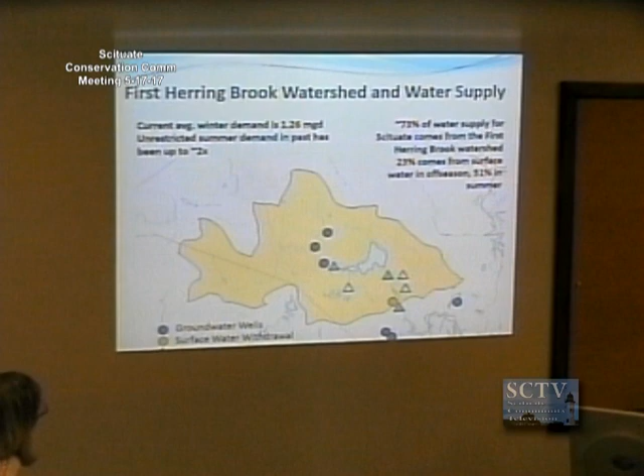Essentially, 73% of the water for Scituate comes from the First Herring Brook watershed, and 23% of that is from surface water. History goes way back.

2011, the modeling was done with this WEAP modeling to look at water supply. In 2012, we did a preliminary assessment, basically appraisal level, very short and high level, looking at what options exist to get fish up into Reservoir Dam.

We also worked on improving the baffles down at Old Oaken Bucket to get fish up into Old Oaken Bucket Pond. In 2013, we did a feasibility study, and in 2014 we followed that up with a preliminary design.

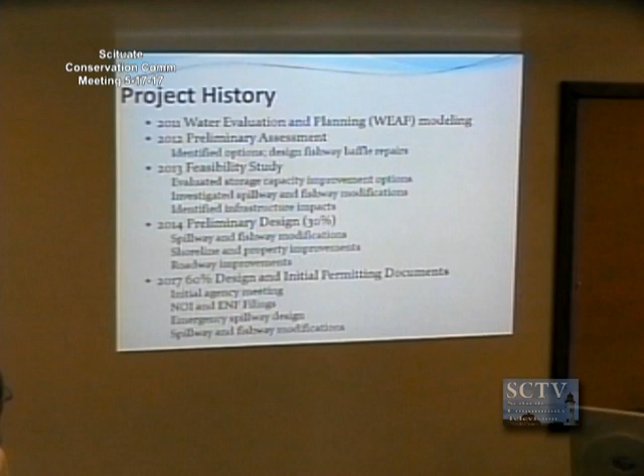Now we're in the 60% design and initial permitting phase, and the primary purpose is to get the Notice of Intent process started, and also to begin the Environmental Notification Form process with MEPA.

Our project goals have been to meet Scituate's water needs while also providing seasonal stream flow for aquatic habitat in the First Herring Brook, downstream of Old Oaken Bucket, between Old Oaken Bucket and Reservoir Dam, and upstream of Reservoir Dam, and also to get the fish ladders functional.

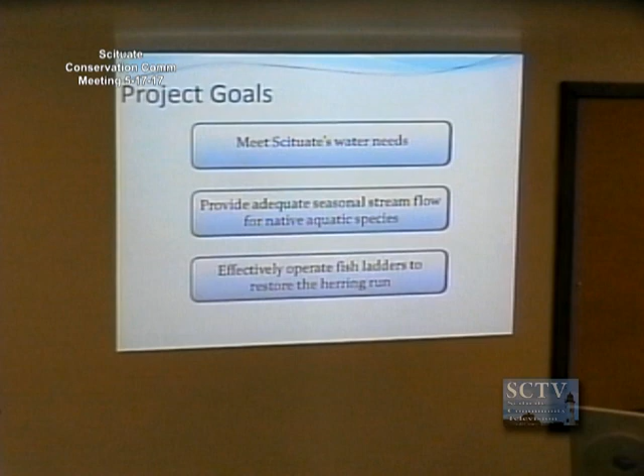In 2011, they came up with an interim operational plan, which is still being implemented with some minor modifications over the years. That plan essentially looked at ladder operation at Old Oaken Bucket, and also incorporated some irrigation restrictions and watering bans.

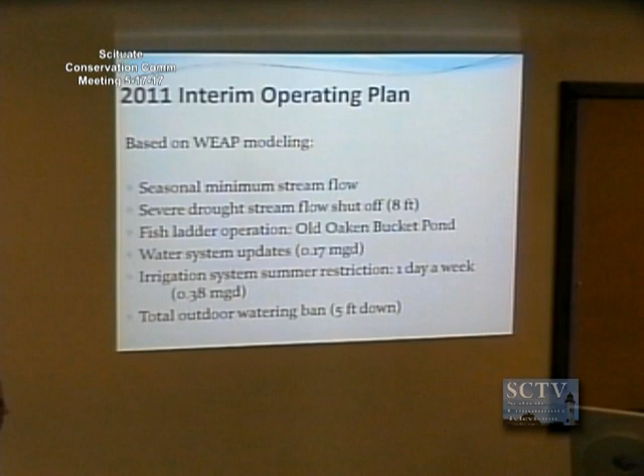The modeling we did to look at the alternatives was extensive. There were around 100 scenarios looked at, covering a range of things from modifying the dam outlet.

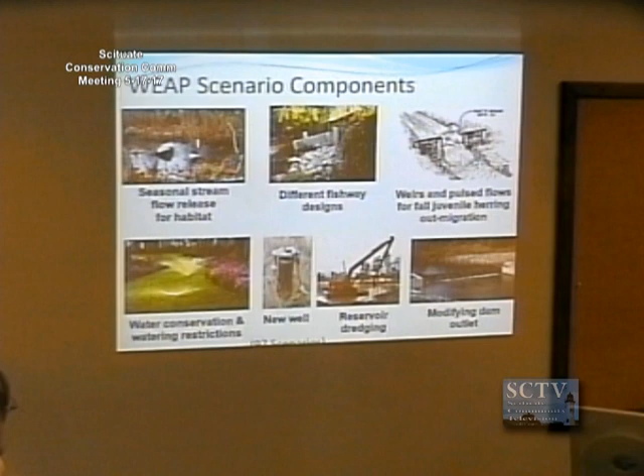Putting in different fishway designs, seasonal stream flows, and new water well sources. In 2013, the model was updated to look at improving and increasing the water storage. During that study, we looked at raising the pond level up to 3.5 feet above where it currently is.

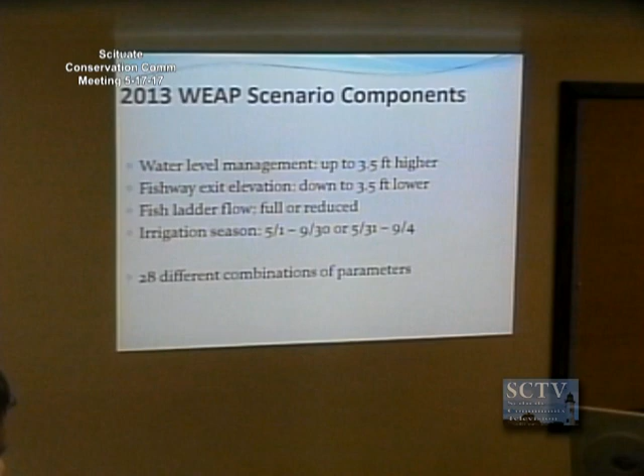From that, the most promising scenario was raising it 1.5 feet, and that's where we are now. We're looking at lowering the fishway exit 3.5 feet, and we're looking at reduced flow in the ladder.

Right now, the ladder is allowed a lot more flow than necessary for both upstream and downstream passage. We're also looking at the irrigation system and irrigation season limitations.

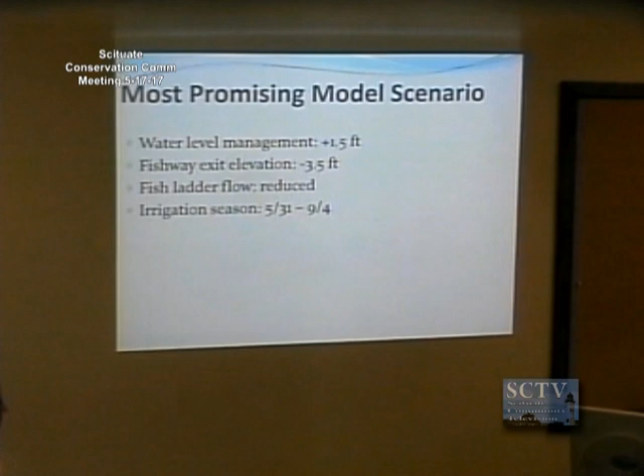Our modeling this year basically compares the existing fishway and current operations to the best modeled scenario. As you can see, the proposed plan provides much more effectiveness than the existing setup.

One of the important things is the minimum reservoir level. Currently, it goes down to about elevation 32, and in the proposed scenario, it would be about 3 feet higher.

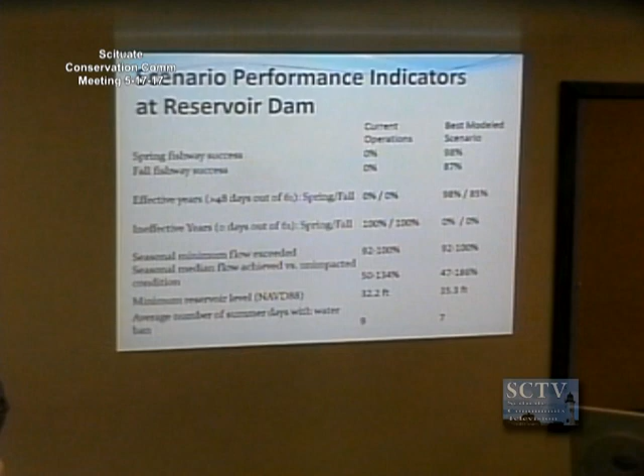This year we looked at 3 or 4 different scenarios, and this is the best of them. The basic challenge here is trying to increase the water storage above the current spillway crest.

Right now, the management flows are released through the low-level outlet. The plan would be to release a good portion of those flows through the fishway instead.

So it would be a combination of the low-level outlet and the fishway to get the stream flows necessary for both water supply and habitat.

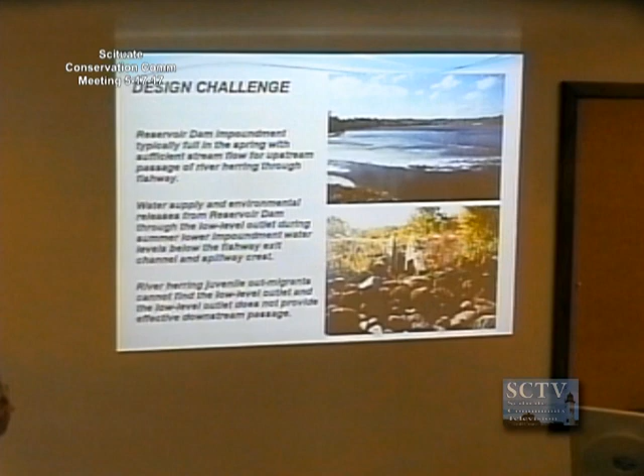This is a picture of the fishway on the left. Essentially, we're looking at lowering that upper exit channel about 3.5 feet, and by raising the normal pool water level 1.5 feet higher, that will give enough storage for sufficient water in the fall for the outmigrants.

In the spring, there's generally enough water for upstream migrants to get there. The problem is when the water is used during the summer, the fishway becomes unacceptable. So by lowering the exit and increasing storage, we have a higher range that allows proper operation.

What we're looking at on the right-hand side on the spillway is putting in a bottom hinge gate that will be motor operated. We're looking at putting that into the SCADA system so that it would be operated from the water department.

Essentially, with the proposed spillway modifications, there would be no change to the flood control aspects of the current spillway. As it rains and the water comes in, that gate would come down, so if the water level goes up a little bit, the gate comes down to more evenly control that water level at the higher level. One benefit of this gate is follow-up: if you get a real flood, the gate goes all the way down, but as that flow is receding, you're able to bring the water back up to save that 1.5 feet of water rather than letting it go down and having to go back to square one.

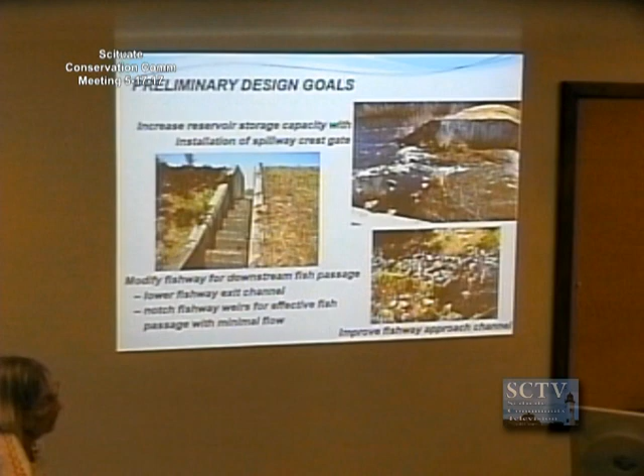The other aspect of the project, in the lower right-hand corner, is the entrance to the fishway at the bottom end. It's difficult for fish to get up there, so there'll be a few minor stream modifications, including a stone weir, pool and weir, to get the fish up there -- I think there's two weirs.

So basically, what we're looking at is raising the pond level to elevation 40.4, which is 1.5 feet above the existing crest, and this will increase the storage capacity by 108 acre feet of water.

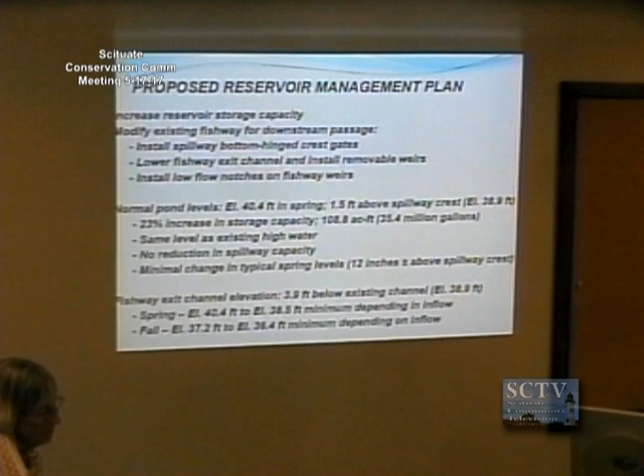Essentially, the water currently gets up this high at the spillway during the spring and flood flows. That happens now, so we're not raising flood levels -- it's essentially the same conditions experienced now. And then, as I said, we're lowering the fishway exit channel to allow passage in the fall.

What has been added to the project this year was the spillway capacity. The Office of Dam Safety has recognized that the spillway does not have adequate flow capacity to pass the design flood with adequate freeboard. So this project will involve increasing that spillway capacity by lowering the crest about 3 feet. The gate will be higher than the 1.5 feet originally planned back in 2014, and would include a larger gate to give the flood capacity to discharge half the probable maximum flood with freeboard.

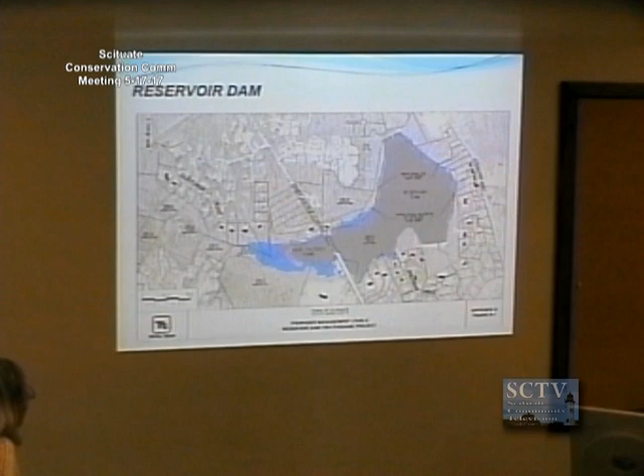So that's the spillway up in the upper left. What we're talking about is putting a gate section on that, lowering it by about 3 feet -- the crest will be coming down, I think, 3 to 3.5 feet. That gate will be motor-operated with automatic controls, set up with a water level sensor, so it would actually follow the inflow to make sure we don't waste any water.

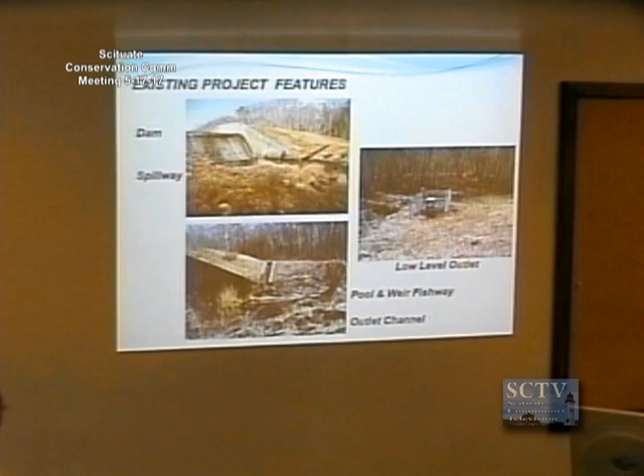The fishway at the bottom end -- we've got to fix the lower weirs there, and you can see the channel down to the right. We've got to do some stream work, moving some rocks around, putting in a couple weirs to get the fish up to that fishway entrance. That's a low-level outlet on the right-hand side -- a 12-inch pipe with a control valve that the water department currently uses to release flow to Old Oaken Bucket.

And just some more pictures of it, with some flow, actually. You can see the Old Oaken Bucket fishway on the left-hand side.

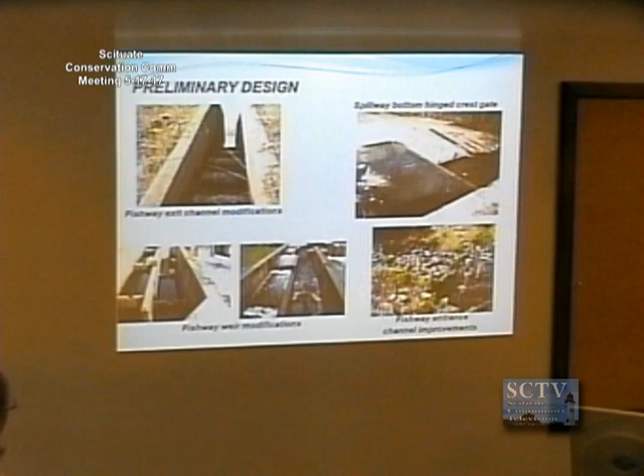Those are the modifications that were put in during 2013 to save water through these low-flow notches. Benefits: we're basically providing 23% more storage, 108 acre-feet of water. This will allow continued water supply, better water supply, while providing environmental flows, and will provide more resiliency to drought and emergency conditions.

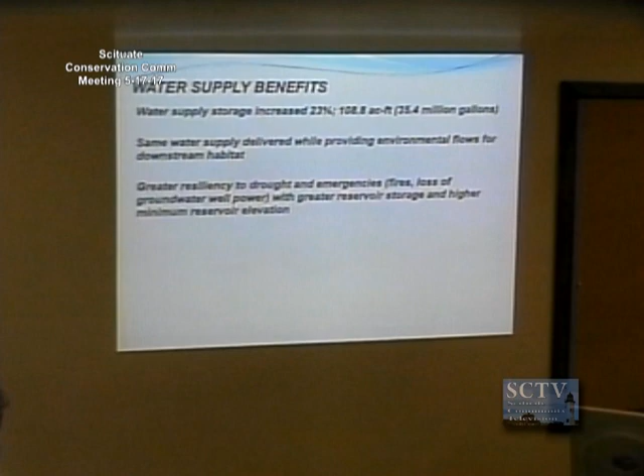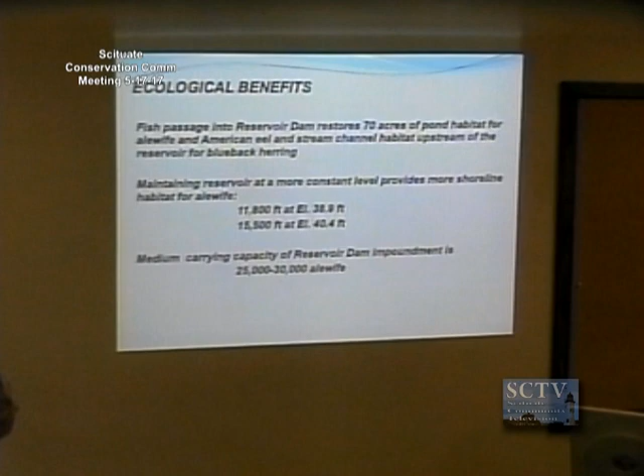Ecological benefits: we're essentially restoring about 70 acres of pond habitat for alewife and American eel, and opening up the stream channel upstream of the Tack Factory Pond for blueback herring. Essentially, the 1.5 foot higher level increases the shoreline habitat by about 4,000 linear feet. Sarah's estimated that the median carrying capacity of the reservoir impoundment would be about 25,000 alewife versus 0 now.

The good stuff that you're all interested in: there's about a 1,400 linear foot reduction in bank length.

Is there a reduction? What's that? A reduction in bank length? Yes. We defined the bank length currently, and when you raise the water level, the bank length actually changes - it goes down. It seems a little contradictory. It does, but that's only when it's full, too, right? But it's going to keep it at a steady level.

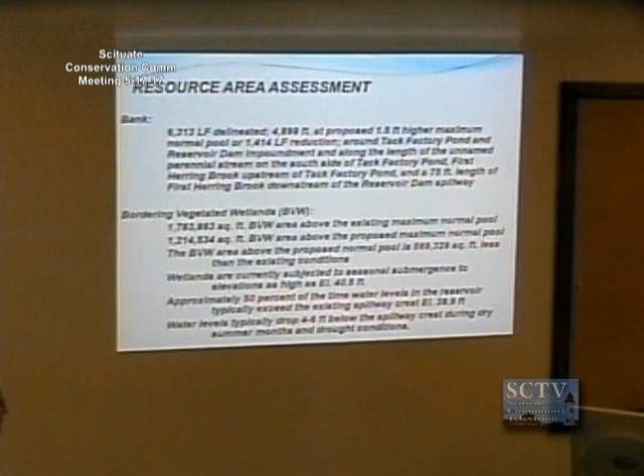Land underwater at the existing reservoir is about 52 acres. At the higher reservoir, because the mean annual low flow level is higher, it increases to 60.8 acres.

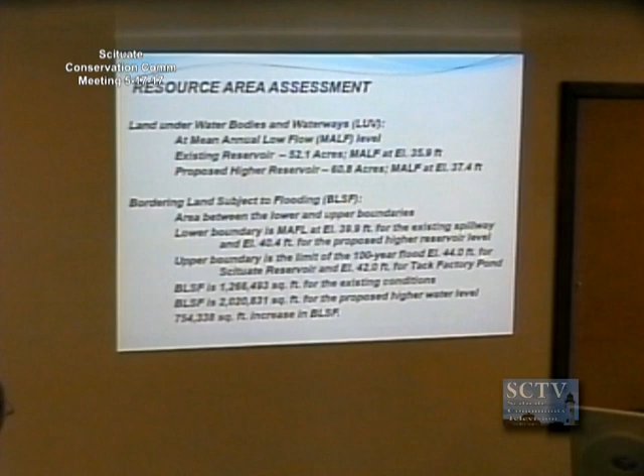Bordering land subject to flooding is increased by about 750,000 square feet because of the higher water level. Riverfront area: the current pool is about 330,000 square feet, and with the 1.5 foot increase, it goes down to 278,000 square feet - about a 52,000 square foot decrease.

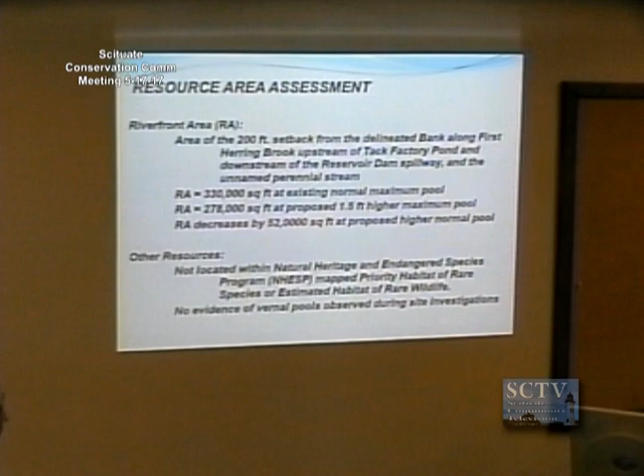And the other resources - basically the site is not located in the Natural Heritage and Endangered Species Program, priority habitat of rare species, or estimated habitat of rare wildlife areas. And while our wetlands scientists were flagging the wetlands, they did not observe any vernal pools around the edge.

The project will include some shoreline improvements. Basically, there is no change in the high water level. There are about 14 acres of land that would be subject to seasonal flooding more than now. The water supply buffer zone - everything is within the 150-foot water protection district.

All properties currently within the DEP Title V regulated areas are within 200 feet of the reservoir. Septic systems: there are 3 systems near the pond off Chief Justice Cushing Highway, and 2 of them have raised mounded systems. In 2014, we did some groundwater monitoring, and it looks like there's adequate separation between the groundwater and those septic systems, so they should be okay. There was one property that would have to be upgraded.

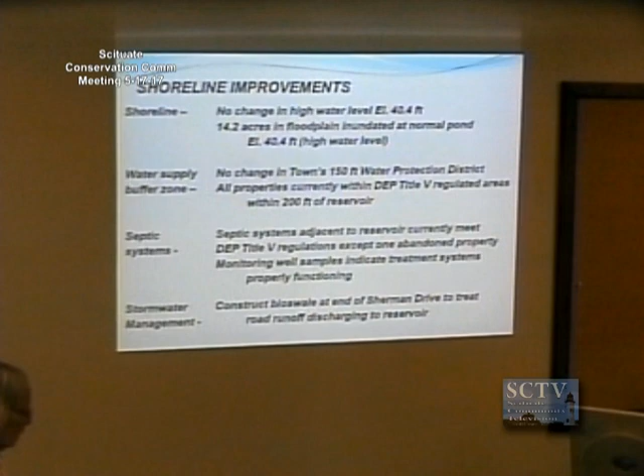The project is not really changing any of the stormwater management practices on Chief Justice Cushing Highway. At Sherman Drive, there is one catch basin at the end that drains via pipe to the reservoir. As part of the project, we're recommending that an oil grit separator and a bioswale be installed to give that some treatment going into the water supply.

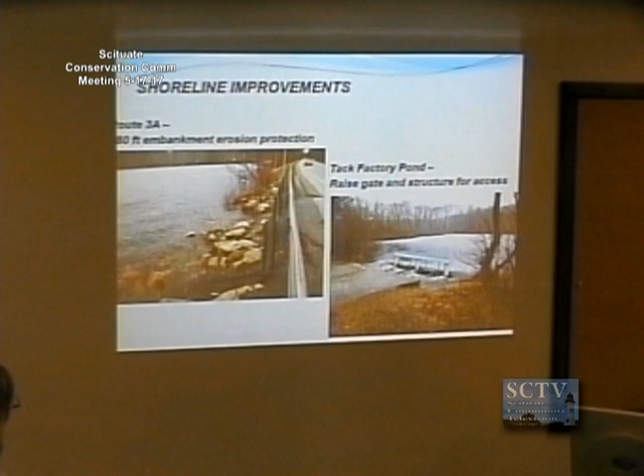Also included in this project will be improved access to the slide gates on Tack Factory Pond. Essentially, there will be a small walkway extending over to that structure so that the water department can access it during wet conditions.

For this year's design, we basically had some initial agency consultation. We had a meeting back on March 8th. We invited everybody in the state, DEP, drinking water, wetlands, Corps of Engineers, DOT, everybody, and we had a meeting. About 8 or 9 folks showed up, so we initiated that and got their input as best we could.

The second thing we're doing is what we're here for, this NOI that we filed. We'll be filing a MEPA ENF shortly. As part of this project, we had to do this emergency design. The Office of Dam Safety, the DCR Office of Dam Safety, suggested a low saddle in the embankment to catch the overflow. The problem is right now, the design storm, the 1/2 PMF, overtops the dam embankment by about 1/10 of a foot, an inch or two. So that needs to be remedied, and it's been added into this project, so if you're going to do spillway modifications, let's get it all in the same boat.

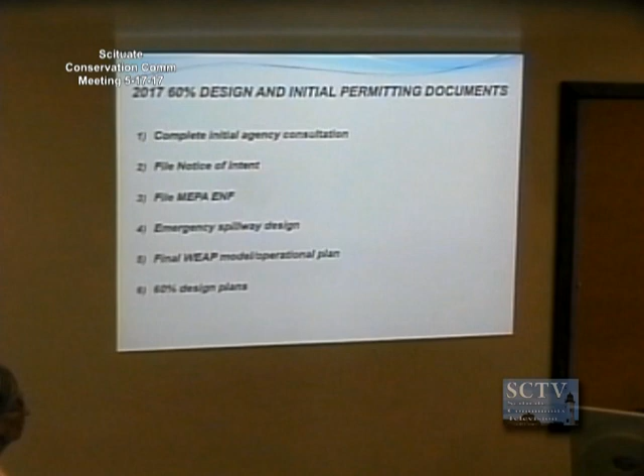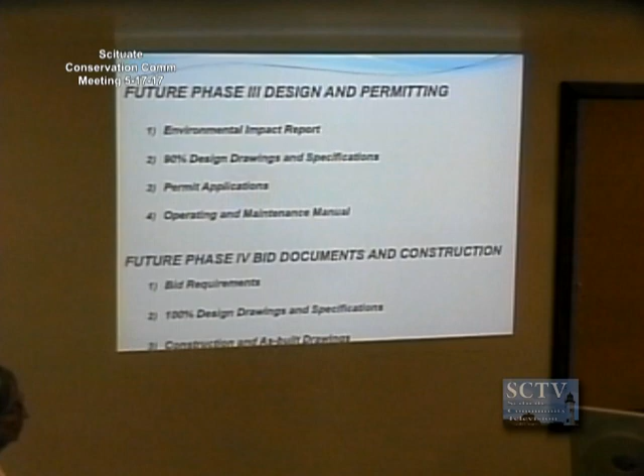We did additional WEAP modeling. Some of the results are presented, and we're also preparing our 60% design plans, which will be used for the next stage in the environmental impact report and design construction drawings. So the project's not over yet. We've got the design and permitting phase, and then we've got the construction phase coming down.

So basically, the process is we're filing this notice of intent. We are expecting a denial with conditions because there's more than 5,000 square feet involved. We'll appeal that denial to DEP and request a superseding order. We expect DEP to deny it, and then we'll be preparing a variance request. And that will lead us into the EIR.

Pete, correct me. No, you're right. That's unfortunate. It would lead you into what? Pete Dillon is with Tetra Tech, our hydrogeologist, supporting me. Just explain that when you get to the denial piece, then it takes you to what step?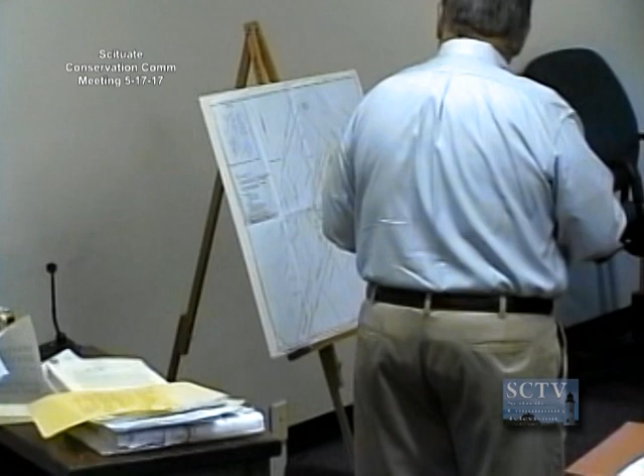We also talked to DEP, and what they said was that on the coastal dune, decks are allowed as long as they're on piles and at least 2 feet above the ground. This is how the deck was originally designed in our first submission, so it does meet the performance standards, so the water can flow underneath it from the ocean to the landward side.

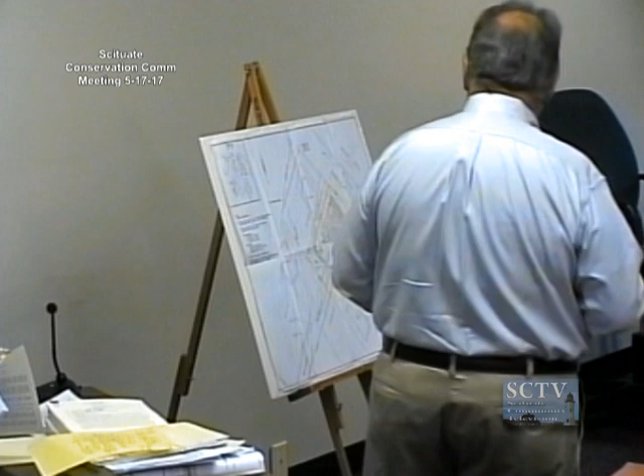There's about 8 square feet of alteration due to the size of the piles. There's no vegetation out there, it's all rock and stone. The project is pretty straightforward, so the additional information you asked for has been submitted.

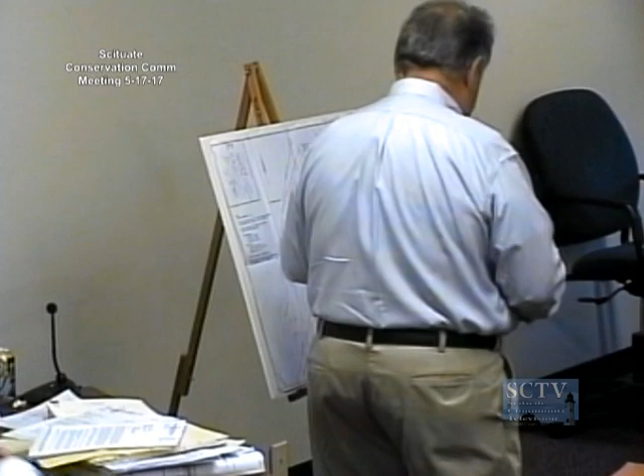Okay, Penny, do you have any other questions? No, I really don't. Do you want to look at this? I do, believe it or not. Pat, this is it. Yeah, all the things we asked for were submitted, and they're on this plan.

I don't get it. So it's within DEP's rules and regulations to build an additional deck on the beach, in the water? If you meet the performance standards and you're on pilings, and your house is already there, you're not adding a new house or anything, it's... But you're adding additional area into the coastal dune? Yes, and they allow it. The answer is yes, they allow it. Surprise.

It states that right in the Wetlands Protection Act. I had submitted to the DEP a very generic question about building a deck for an existing house on a coastal dune, an area which is already built out. And their response was — and we have that — in an area that was already developed, you can have an accessory project on a coastal dune as long as you meet the performance standards.

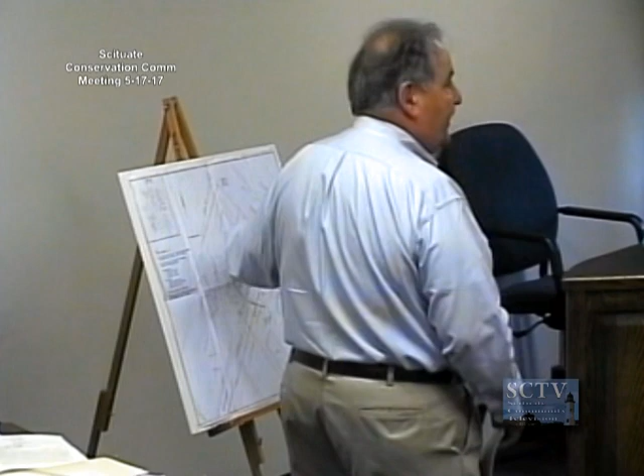The performance standards here are fairly straightforward: it has to be up high enough so the water can go underneath it, you can't alter the land or remove sand — there is no sand out here — and you can't alter the vegetation — there is no vegetation. So in that respect, this is outlined in your letter, and I also sent Pat a copy of the correspondence from the DEP, which you have as well.

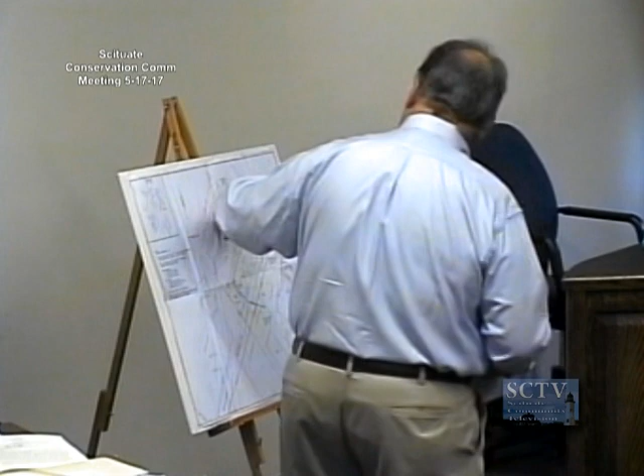And what they look for is not where you are relative to the water. What they look for, and this is in their memo, is to make sure that this deck meets the performance standards for doing work on a coastal dune. If you notice here, there's a new house built in 2013 with the deck up to the property line. There's also an open deck on an older house, but these all met the same performance standards. Those haven't changed.

Yeah, Bill, we've actually had people knock down houses and build a bigger house. But if they can conform with the setbacks... we're not going to agree on this. Rule's the rule. We can try to change the rule. I think it is altering the area, so we're not going to agree on this.

Well, no, I don't have any questions. I'm surprised, but I don't have any questions. We had some photos of this before, and it showed the cobble right up to the front of the house, and on all sides of the house. So your deck is going to be on top of that cobble. Well, the deck's going to be about 4.5 feet above the ground. The top of the deck comes off the first floor of the house. The existing deck is at 18.2, and the proposed deck will be at the same elevation. The ground elevation is 13. Those piles have to be at least 2 feet above the ground elevation, or at least at 15. The top of these piles are going to be at 17.

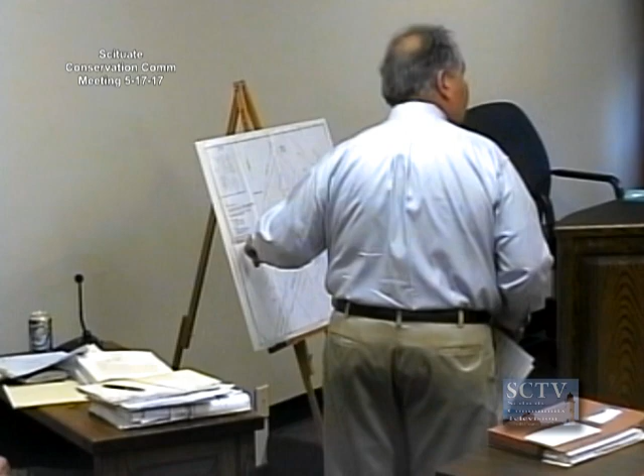And this is the new FEMA flood? You're working with the new FEMA? Yes. Well, that can't be attached to the house, right? The deck, there has to be a space in between the house and the deck. There's a row of piles at the front, there's a row of piles up against the existing house. So this deck is not attached to the existing house. You can't do that anymore.

Anybody, any questions for Whalen, 57 Seaside Road? It's a deck. Make a motion to close. Second. All in favor?

Just, I want to just make another, Frank. No, she got it. Okay, sorry.

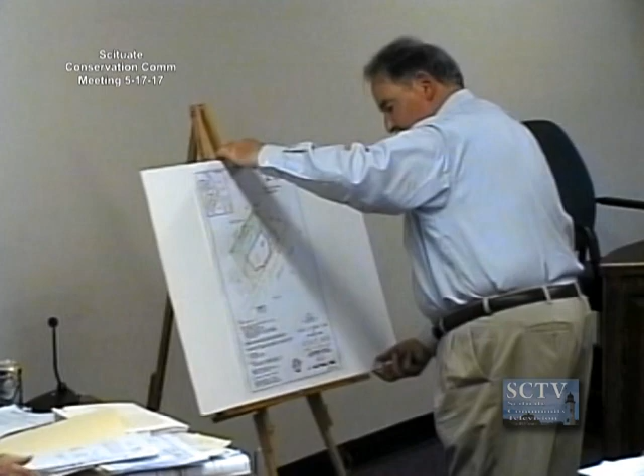This property is located at 169 Jericho Road, just before you get to the turn of the road, which is right here. The ocean and the land around it is owned by the town of Scituate. It's the parking lot for the beach area.

Mr. Camo has purchased the existing dwelling and an outbuilding behind it, both of which will be razed. In its place, there's a proposed single-family dwelling to be constructed in the outline shown in orange on the plan. The site is in an AE zone, elevation 15 on the new maps.

So the top of the foundation, there's a proposed garage underneath. This is the entrance to the garage in here. The first floor of the house will be at elevation 22.2, and the garage slab is just above ground level at elevation 10.5. The first floor of this house will be well above the FEMA elevation requirement.

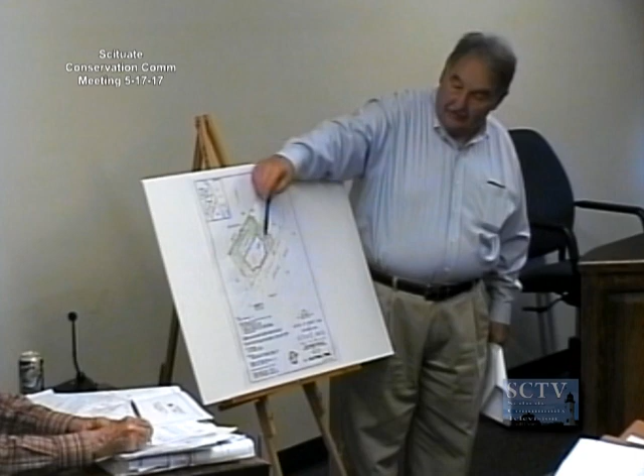In the area where the cars would come into the garage, perhaps park here, there's also going to be pervious pavers in this area. This is all sandy soil here, so it makes sense to put the pavers in there to let the water go through it rather than run off into the town property or the house next door, which is also owned by Mr. Camo.

We have been to the zoning board. The existing house actually encroached into the street. We're going to push it back. We're going to meet all the setbacks on the side and the rear.

This was in the Scituate floodplain district. They issued a special permit for a substantial improvement as well, so all the other permits that were required to file prior to coming here have been obtained. The appeal periods have run out. We went to them last fall.

There are 6 flow-through panels on the house here, on the foundation. This will be a reinforced concrete foundation with a flow-through. It doesn't have to be on the island? It's on a foundation, sure.

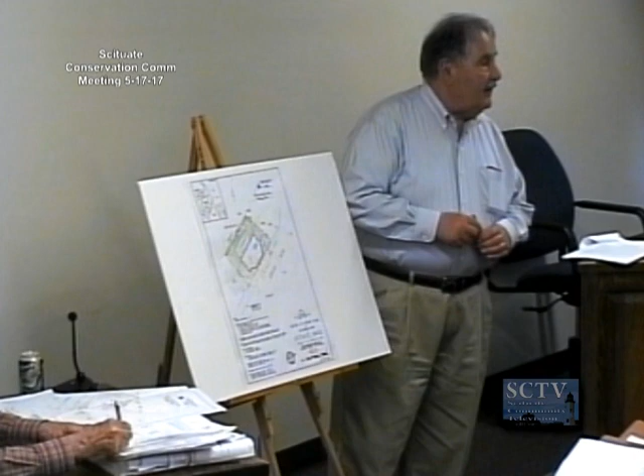It's in an AE zone. All of these houses were recently built - this one and the 3-story house next door - that's all poured concrete foundation. This whole area is in an AE zone, not a velocity zone. AE elevation 15. It actually came up 4 feet from 2012.

But there will be breakaway panels? Yes, as stated. We have to do that, both to meet your requirements, but also the building code and the FEMA construction codes. The grade change here is very minor.

The site's relatively flat, and we're going to keep it flat. There's actually a net decrease in the impervious area. The reason is that all this asphalt is coming out, and everything around it's going to be pervious. There's a small patch of asphalt here that'll stay, but everything else will be a lawn.

We're going to install some rosa rugosa around the perimeter, both to act as a privacy fence, if you will, between the parking lot and this property. And again, this is his lot as well.

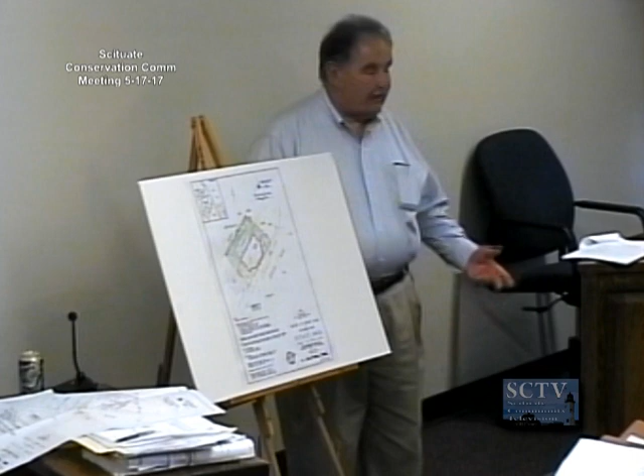There are no performance standards here other than building the house in accordance with the state building code and the FEMA construction requirements, which your regulations refer to as well. So I think that concludes my presentation, and I'll answer any questions you may have.

Paul, what's the difference in the footage with what's there as opposed to what you're doing? The square footage? Yes. It's pretty much double. There's an 18% decrease in the footprint - impervious, but the footprint difference I don't know the exact number, but if I can just show you here, there's a covered porch.

What's the resource here? The resource is the ocean, and there's wetlands out there too. Putting it into here, it's probably about a 5% increase.

And how far back are you moving the house? I'm sorry, I'm not seeing the plan quite close enough. Oh, the house was into the street.

Yeah, I know, I've been there.

We pushed it back 6 inches. The zoning board held us to the rear yard setback of 20 feet. We do meet the side yard setbacks, which are 8 feet - this is 12.7, and this is 15 feet.

The footprint of this building is essentially, just by eye, about 5% bigger than the existing structure, including the house with the covered porch that's being added.

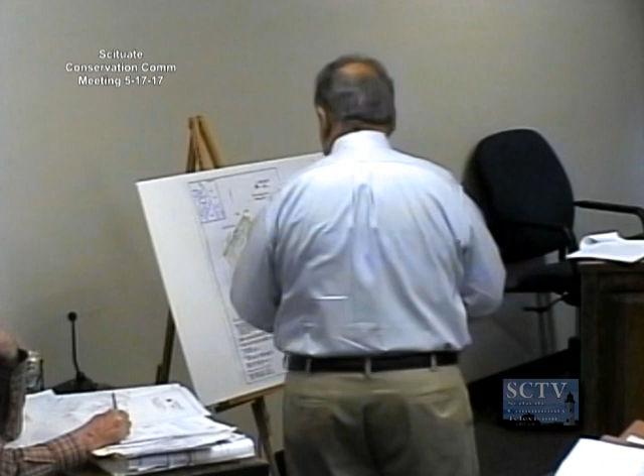Richard, it looks like the whole thing's moving back about 5 feet if you include the porch. Looking at your scale here, that's a reduction of impervious surface.

What is he taking out? He's taking out this - you said, Paul, just down 6 inches, down the sidewalk, right there? Oh, the covered porch one is just on the side.

This is the last one of the bunch. I got it now - it looked like that was connected. Great improvement.

I'm all set. So this is land subject to coastal storm flowage.

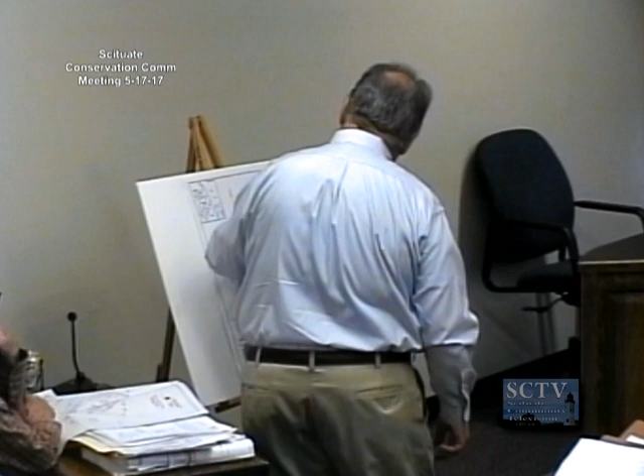What is the garage doing - is that going to be a solid foundation too? It's under the house. Yes, this is a solid foundation wall. You see the word garage in the right corner? It's actually on an angle, underneath.

Right there - see, the garage goes from here to here. He's got a garage door, he put the cars underneath. By doing that, he doesn't have to park on the street.

So the garage would be over here where the deck is now, essentially. Yes, all of the parking is underneath the house now. In summertime, we had photographs for the zoning board showing cars parked on the street on both sides because they're going to the beach and the parking lot filled up.

Richard? I think it's an improvement. Paul? No, I'm good. Lisa? All set. Pat - did they consider pilings or anything, Paul?

We're trying to limit the number of places with channelization, and everything in this area is in an AE zone. We're trying to promote and encourage that, but legally he can do this - building the concrete foundation, he can have parking underneath for all the vehicles and keep them off the street, and still meet regulations. Except if you have land subject to coastal storm flowage and you have foundations, you're getting more channelization, and we're trying to reduce that.

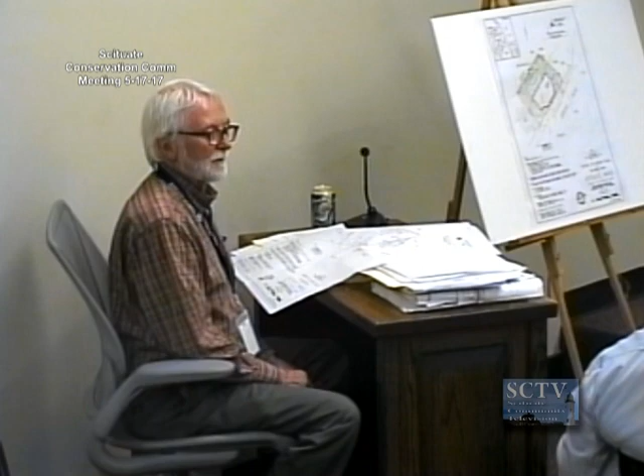But you could also park under pilings too. But anyway, did the building department look at the structurals for this? Have they already seen structural plans? No, those will be submitted with the building department - the foundation plans.

The plan I submitted to you is the foundation plan. It shows the size of the house, it shows the flow-through vents, and we'll probably look for the stamp of the structural engineer on the structural plans. He has to do that in order to meet the FEMA requirements and the state building code.

Did you see that? So you brought in the vent plans tonight? I haven't seen those. This isn't from an engineer, so he can't stamp it. What do you get - 6 of... 6.

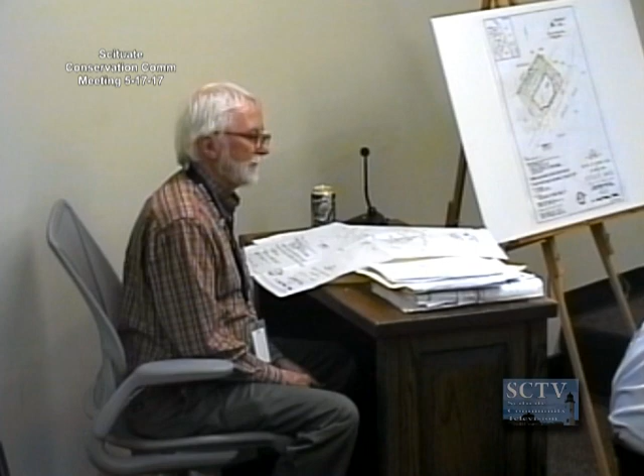The amount of fill, is it less than a foot? Way less than a foot. That site's relatively flat, and the pavers are going to take up the back of the house and the side. This will just be a lawn area - we don't need to change the grades out there.

The land slopes from elevation 11, this is 10 in here. I mean, the whole site's within a foot of each end. And the only other thing is that, as you approach the beach, there's a lot more vegetation there currently.

A lot of that's going to be removed and replaced with pavers. That's on the town property, on that point there. The town owns this piece here, they own all this. That may become an area for bicycle parking, or some kind of use we suggested to them.

So you're doing Rosa Rugosa on the parking lot side? That's all full of Rosa Rugosa now.

Is there anybody in the audience who would like to address 169 Jericho? I guess, Pat, the only thing that, where you are putting the concrete foundation in...

Paul, Pat's concern is about that water being redirected or whatever. I would think about the plantings in these areas and make sure that they were as stable as possible. We know in most cases, the water from that area isn't so much coming over the beach, it's actually coming from the north.

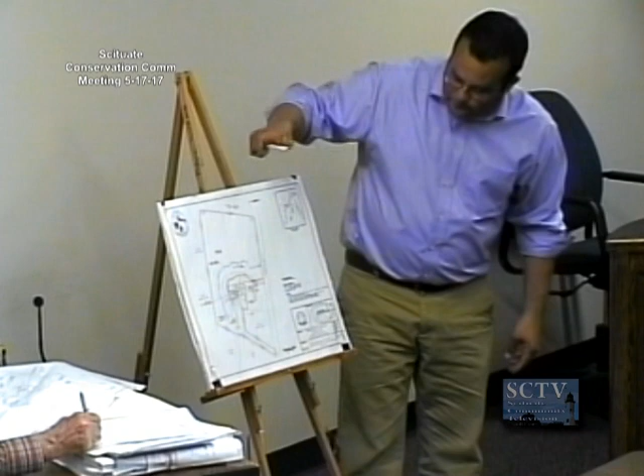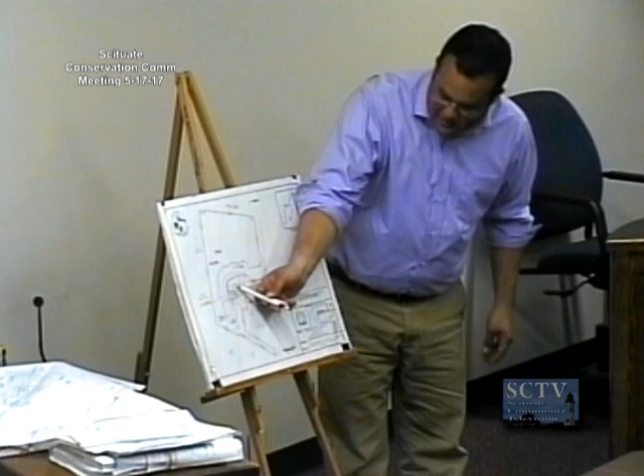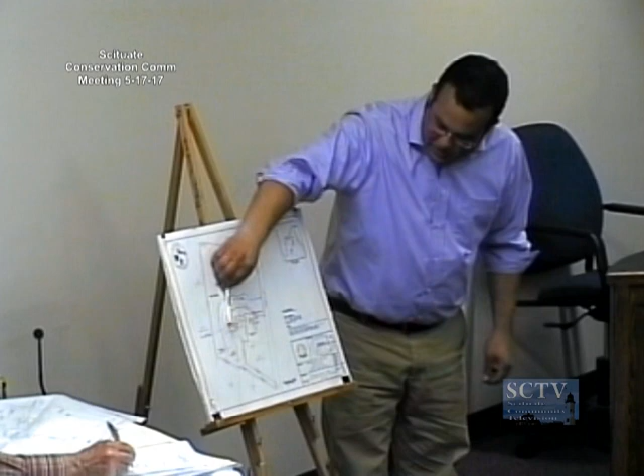You can see we're holding this southerly side and going to the north with the proposed building. Water and sewer services are already up to this location; we'd simply extend them 6 or 8 feet within the footprint of that unit to connect to the new building. The grading is very minimal, just around the back side of the foundation. This sits on top of a knoll that's out there, so very minimal grading along the back of the property.

We have an erosion control barrier that would encompass our down-gradient limit of work, and we would line it out around the driveway during construction.

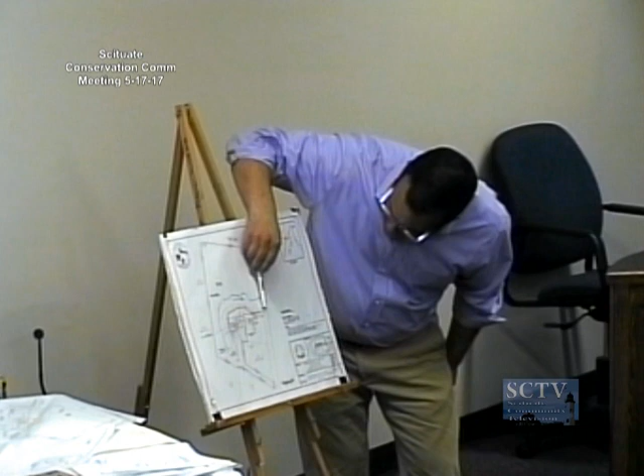Question: where's the driveway, how are you getting in there? The driveway is this light line here, edge of gravel — the existing gravel driveway, with a water and sewer line under it. We're not proposing any change to that driveway; we'd use it as is.

So the land in front of this duplex actually belongs to the neighbors? Correct — there are two single-family houses out front on these two lots, on both sides.

So how much are we adding into the 50 and 100-foot buffers respectively? The footprint here — in the 50-foot buffer zone, there's currently no building inside the 50-foot buffer, and we're not proposing any building inside the 50-foot buffer. Between the 50 and the 100...

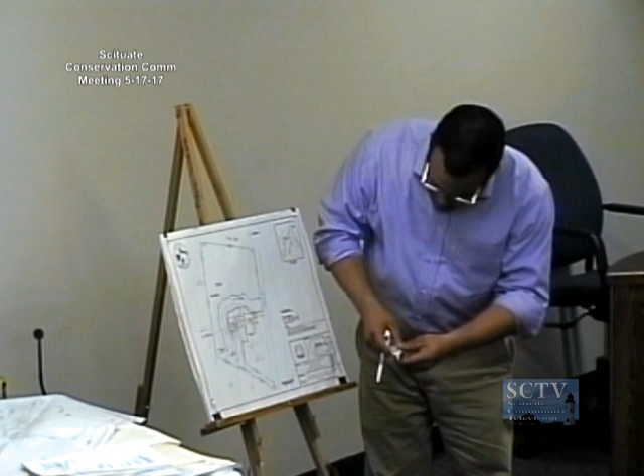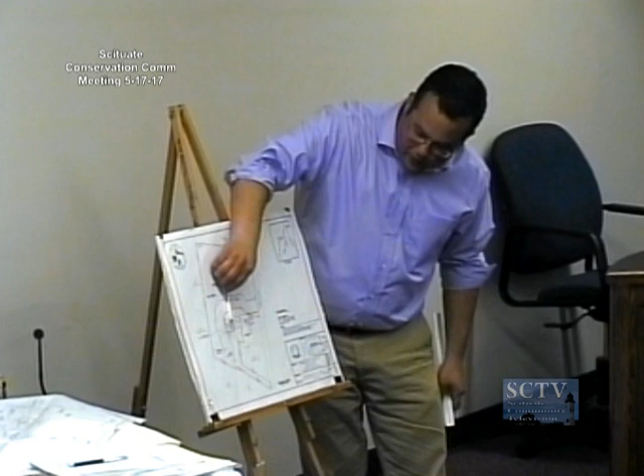The existing building is 40 feet by 30 feet, including a piece of the deck that extends out off the side of the building. The duplex starts at the edge of that existing deck and extends this way — it's being replaced with a block here. This represents one of the units, a 40 by 30 unit. So it's doubling? If the existing is 40 by about 30, yes.

It's doubling. That second unit, though, extends outside the 100-foot buffer zone. So it is just about the same as the existing inside the 100-foot buffer? Yes. Okay, I'm sorry.

Bill? That's it, thank you. I'm good, no questions. Lisa? Nothing. Pat? Is the driveway staying gravel? Yes, for this. Okay.

I think the only other thing is there were no wetland flags visible out there, no wetland report already. We had tide flags — the flags are up, they're a little hard to find, some were yellow-flagged. They were flagged a while ago, so I can do a site walk and show you the flag locations. All right, is there a narrative they could put in there of what they found, and maybe a couple of soils?

Who flagged that, Greg? Terry McGovern flagged those. Yeah, he's a PLS — a land surveyor. I don't know... I have a wetland scientist — we've had wetland scientists, we've required PWS reports, so we can have Brad go out and do a flag and a narrative report on it.

And that channel up there, off the salt marsh—is that what you have as bordering land subject to flooding? Because it attaches to a salt marsh ultimately, yes. Okay, so that's a ditched salt marsh that becomes a bordering vegetated wetland?

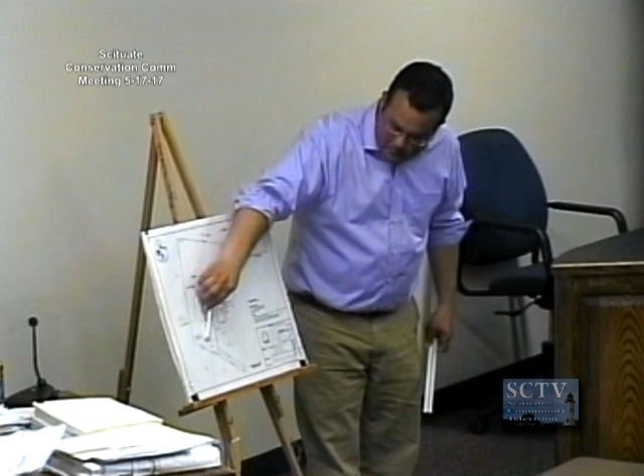No, this is in the 20,000 square foot zoning district, and this lot itself is 3 acres in size. It's certainly not all buildable—everything beyond this blue line is considered wetland resource area. What's outside of that blue line is upland area, about 1.25 acres in size. So with a duplex, if you have twice the minimum land area—20,000 square feet times 2 is 40,000 square feet, which this property has—it allows the duplex.

It just seems like it's going to be right on top of my fence. It does comply with zoning—zoning has a minimum setback to a side lot line. In that district, it's a minimum setback of 15 feet. This one here is at 18 feet on the lot.

If there's a wetlands issue, which we were just addressing, those are the things we want to take up this evening, and we do have a couple other hearings. So those things we'd like to stick to, and if there's a building question or area question, it's either Greg, the building department, or zoning. I'm not trying to sweep that piece under the rug, but we'd like to stick to the purview the commission has in this.

But, you know, we certainly want to make sure the wetlands are protected and there's not more impact or anything like that.

Is there not enough area to deal with the stormwater piece on this? No, it's a raze and rebuild that's going to be in the same location. I don't think we're going to trigger any of the stormwater bylaw thresholds. Do you think you'll impact those folks in any way? No, the drainage from this here generally runs in either a southern direction, or it runs in a western direction down to this wetland. This is kind of the top of a hill here, and it's all flowing this way toward the wetlands itself.

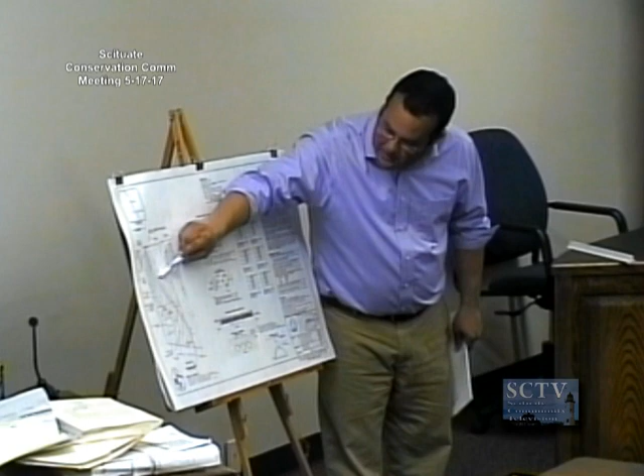Extending off of that river is the 200-foot riverfront area, which I've highlighted in pink on this lot. What we're proposing here is a new single-family home located at this location, a new septic system in the back corner of the property, an access driveway along the northern portion of the property, and the grading depicted on this plan. You'll notice the majority of the work is outside of the riverfront area. What we're doing inside the riverfront area is the regrading associated with the septic system. However, the septic itself is outside of the resource area.

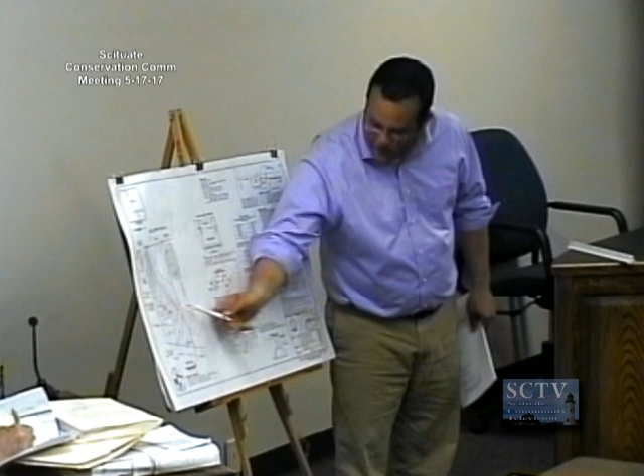This is regraded land. A corner of the building is also located here - it's a distance of 197 feet from the river at the corner of the house. This area here is all existing grass, field grass, and it would go back as grass when it's all said and done. We're proposing a mulch sock around the limit of work, the down gradient portion of the property.

DEP had no comments on this. It's not located in a floodplain district, nor in natural heritage or endangered species habitat. There were no certified vernal pools within 100 feet of this property.

Penny? Could that house come forward some, so you're not even, you won't be in the riverfront at all on those corners?

5 feet, 10 feet? Come forward towards Maple Street, then you're not into those corners. Yeah, we could make that change on the building, pull it out, outside the riverfront. That way it's just going to be grading in the riverfront. Yeah, because you have the room, it looks like to me anyways, you do.

Okay, thank you. Bill? What's the total square footage? So we're not triggering stormwater here either? No, this is under the 15,000 square foot threshold.

So we'd be allowed to disturb riverfront area for a septic system? We're not, it's the grading. Yeah, grading and not the septic system. The system's I know outside.

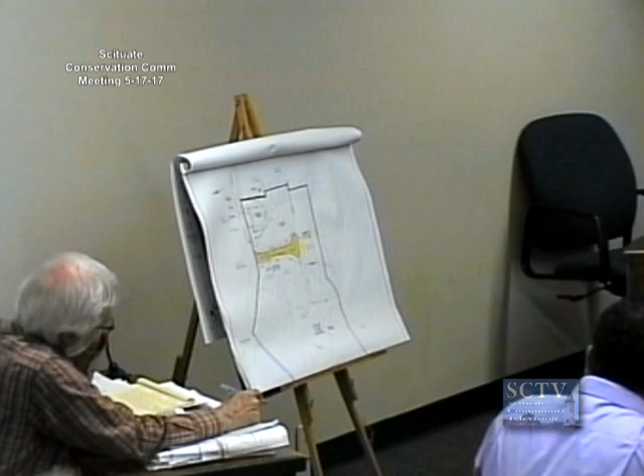It was altered, I believe, back in 1998, which is when the enforcement order was issued. That in turn takes the isolated wetland we had on the eastern portion of the site, the high side of McLean Drive, originally flagged as an isolated wetland, and makes it a bordering vegetated wetland. That bordering vegetated wetland would also become state jurisdictional.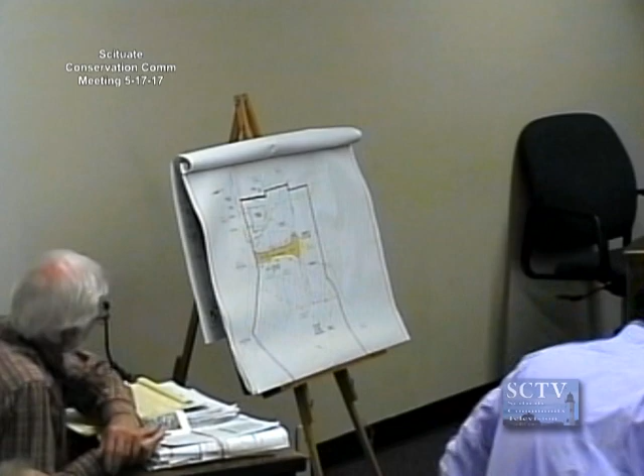As opposed to our original filing, where it was listed as isolated and town jurisdictional only. The other area investigated was behind the former Baron Joseph house, on Lot 8, in this location. There was an enforcement order issued on that property stating there was clear cutting of wetlands. It didn't mention the word fill, and the test pits done out there indicated there was historic fill, the dredge spoils we all acknowledge were put there a long time ago, but no indication of more recent fill or gravel associated with McLean Drive.

That area at this point in time is fully revegetated. I don't know what work is necessary to resolve that outstanding enforcement order. When it was issued, it was issued over 10 years ago. It was requiring Joseph to stop the clear cutting of the wetlands, to file an NOI, and I believe for the site to become revegetated, or propose a planting plan for it to be revegetated. And that's happened naturally over time here.

So what we're hoping to do tonight is try to resolve these outstanding enforcement orders, primarily the one along McLean Drive, and whether you think it would be acceptable for us to develop a planting scheme and removal of that gravel.

Other revisions we've made, which we'll submit in a new plan to document: we've scaled back the size of the house, eliminating 10 feet off the western side. We've also eliminated our proposed filling of the wetland area. Our original proposal had included filling a portion here to accommodate the house and some yard area. We've eliminated that filling of the resource, which in turn eliminates the replication we had proposed to offset that filling.

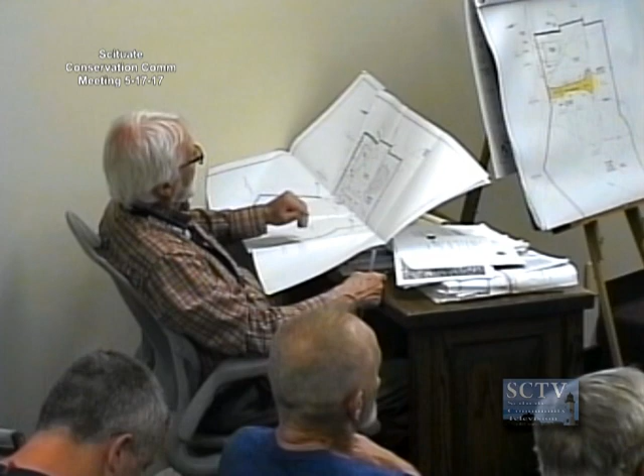Yeah, I've spoken with legal counsel and we've gone back and forth about whether you stick with the language of an old enforcement order or write a new one and start clean, take it out and have a planting plan. With a new enforcement order, you would be writing a new notice of intent to do the work. That would also be the opportunity to bring in information that we felt may have been lacking from the original notice of intent, straighten out ownership of parcels, the listing of the resource areas, and maybe define the parcel a little cleaner than it was originally. But that's something we could talk about with legal counsel.

But I think I agree that if we could get the gravel out and a replanting in there, that would be a good first step.

Is Mr. Gray here? No, he's okay with his report and his photos, but he had a hearing in Sandwich.

So is it legal counsel's opinion that an NOI would be the best way to go on this? Yeah, and DEP, as you... Oh, he's here, I'm sorry, I couldn't see you. I mean, I think that DEP for any of these type of things, start with a notice of intent. I'm sorry, Brandon, I just couldn't see you. Lisa, you have...

No, I was also at the site with Benny and Pat that day. Okay, so the first thing would be to make a recommendation to get an NOI in?

Yeah, I mean, I think we want to start with a vote to issue an enforcement order and have part of that be to remove the gravel and replant.

Okay, pardon me for being confused. Are we issuing a new enforcement order, or are we looking for an NOI, or both? Well, you would do the notice of intent as part of the enforcement order. Because you're going to be working in a resource area and doing replication, you really need to do it under a notice of intent too.